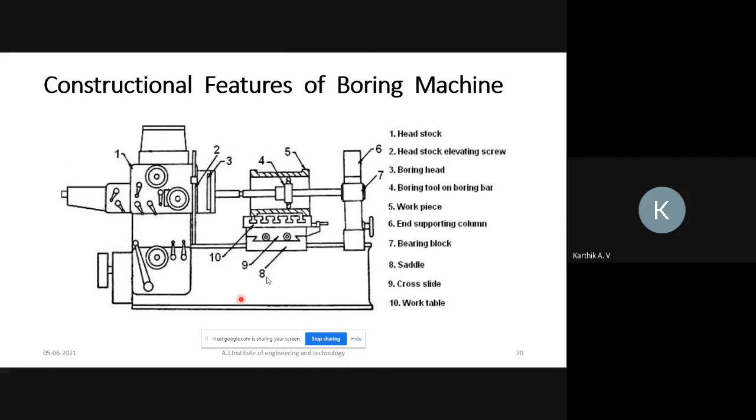Next one is the table type horizontal boring machine. Same as the previous one, this is called the table type horizontal boring machine because a table is used — the workpiece is placed above the table. All the working is the same; you should draw that sketch for this table type horizontal boring machine.

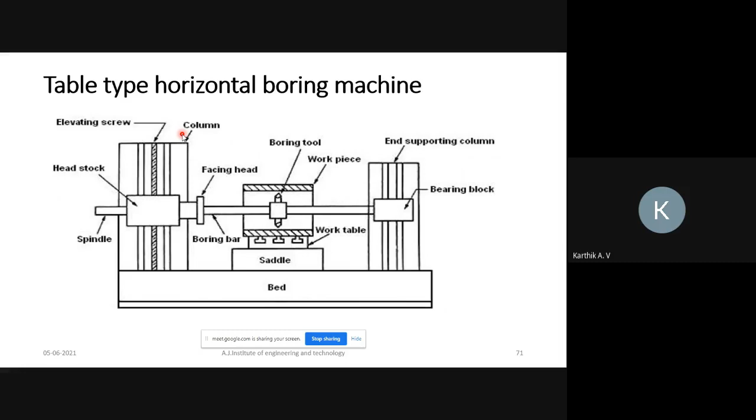Next one is the planer type horizontal boring machine. Two columns are there on either side of the workpiece. Those two columns can be adjusted, moving left side to right side. You can adjust them based on the length of the workpiece — based on the size of the workpiece, you can adjust this column.

This is the headstock, and the driving mechanism is placed inside the headstock. The workpiece is placed above this bed. So it is named the planer type horizontal boring machine. Remaining operations, everything is the same.

The other end of the work tool will be placed here. The tool is attached to the spindle, and the spindle is directly rotating with the help of a motor, and it will perform the operation. If the length of the workpiece is too long, then you can adjust this column, and the height of this headstock you can adjust in that column based on the height of the workpiece.

Why? Because this boring operation is carried out inside the workpiece, this type of arrangement is required. Here you can adjust the headstock height based on the height of the workpiece. Understood? So this is called the planer type horizontal boring machine.

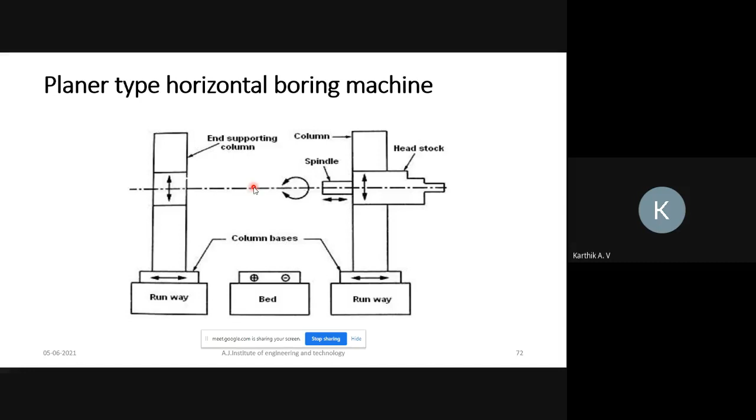Here the workpiece is directly placed on the bed. The other end of the tool will be supported with the help of an end supporting column. So the tool is supported on both ends, and as the tool rotates, it will be removing material from the workpiece — a hollow part is produced inside the workpiece. This is called the boring operation.

Next one is the floor type horizontal boring machine. All the working procedure is the same — so what is the difference here? In the floor type, the workpiece is placed directly on the floor, so large weighted workpieces can be handled in a floor type horizontal boring machine. Very simple — the workpiece is directly mounted on the floor, and all the remaining operations are the same. Any doubt?

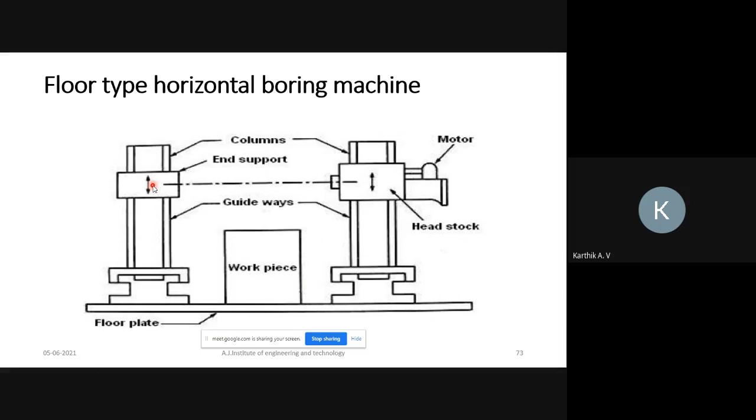Next one is multi-head type horizontal boring machine. The operation is same as before, but the difference is that 2 to 3 headstocks are used here, and cross rails are there so some of the tools are placed on the cross rail to perform the operation. Simultaneously you can perform a number of operations on a single workpiece. That is called multi-head type horizontal boring machine.

Here you can observe the multi-head headstock, 2 to 3 headstocks are there, and each one has a separate motor to run the spindle and the tool. The cross rail moves in the column upward as well as downward to perform vertical operation, while the remaining two headstocks perform operations on either side of the workpiece. Simultaneously it performs operations, and it is mainly used for mass production system. So it is named multiple head type horizontal boring machine.

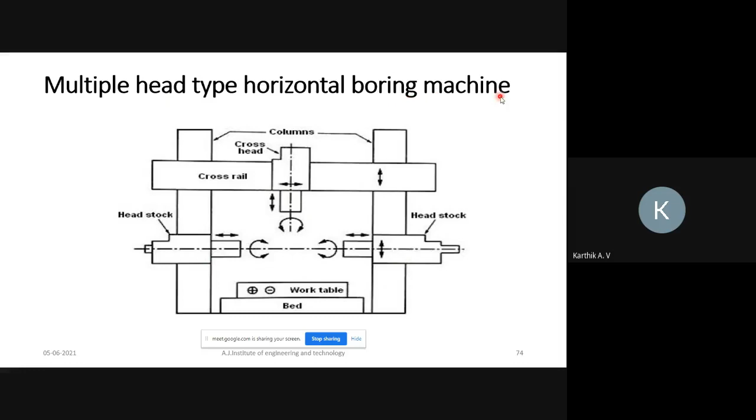Next, vertical boring machine. So far we have seen the horizontal boring machine, now we'll see the vertical boring machine. This is also called turret boring machine, or double column vertical boring machine. How many columns are there? One column, two columns - so it is named double column vertical boring machine.

This is called the cross rail. The cross rail can be moved upward as well as downward direction in the column with the help of this elevating screw. And this is the tool - it will be rotated with the help of a motor, rotating in vertical direction to perform the boring operation.

You can move this cross rail upward as well as downward based on the height of the workpiece. A small height workpiece can be handled by lowering this cross rail to perform the operation. If the height of the workpiece is too long, you can adjust this cross rail upward direction and perform the operation similarly. This is called double column vertical boring machine.

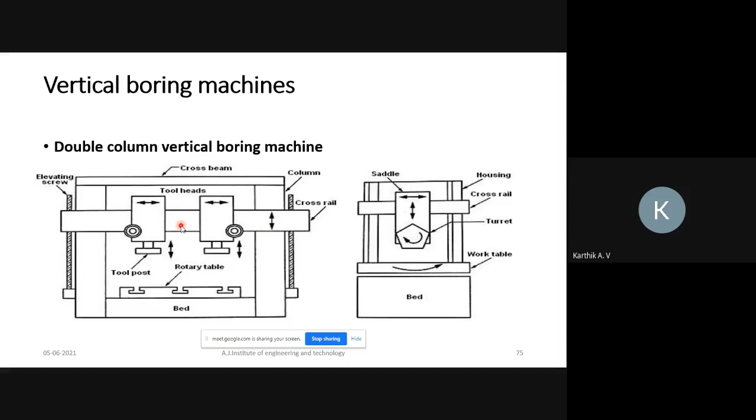Boring is nothing but enlarging the previously drilled hole. This tool can be moved left side to right side and right side to left side based on the requirement. This is a manual method to move this tool from one location to another location. This is the working principle of double column vertical boring machine.

Next one is jig borer. I hope all of you know about jigs and fixtures. Fixture is mainly used for holding purpose - it is mainly used to hold the workpiece properly, that is called fixture. And jig is nothing but to set the position properly. This jig is mainly used to improve the accuracy of a drilling machine - that is one of the tools.

That tool can be produced with the help of this machine, which is called jig boring machine. Jig is one of the tools used to improve the accuracy of the drilling machine, and that tool can be produced using the boring operation in this machine. With the help of boring operation, you can produce that jig equipment. So that machine is called jig boring machine.

Here is the spindle head - the motor is placed inside the spindle head, then the column, and spindle housing. The spindle will be continuously rotated with the help of the motor. You can move this column upward as well as downward based on the height of the workpiece. The workpiece is placed above the work table, and this saddle can be moved left side to right side and right side to left side, having sufficient groove inside the saddle.

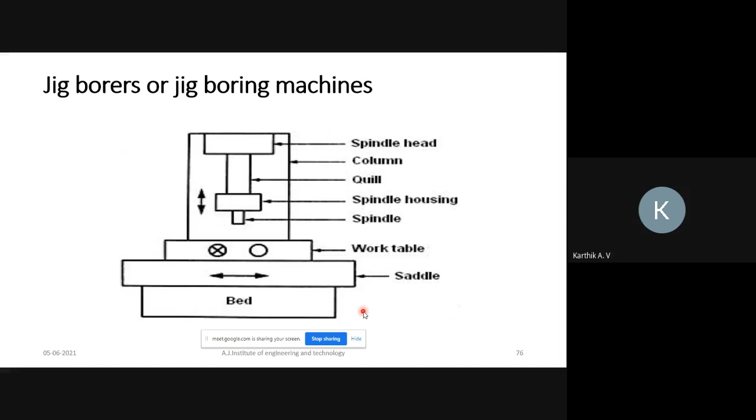So drilling can be done with a jig machine. This is actually a jig machine. This equipment will be produced here.

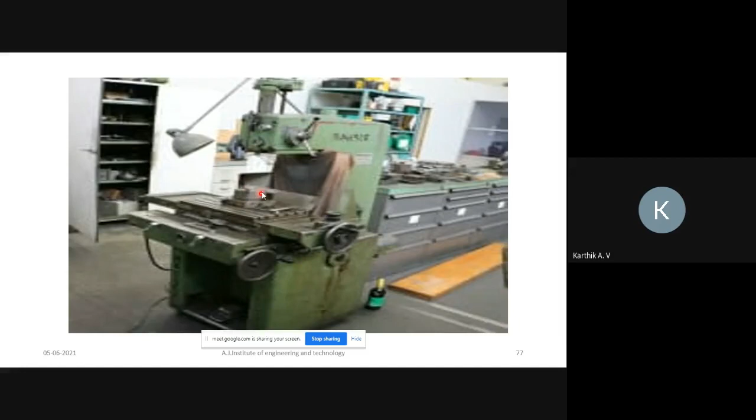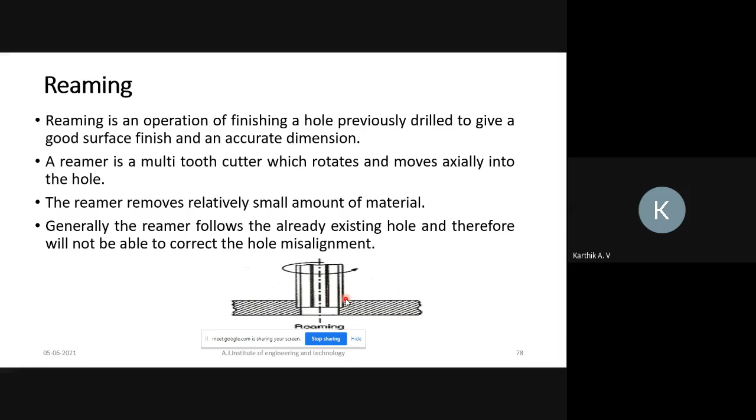Next is the reaming operation. As I already explained, reaming is mainly used for fine finishing after a drilling operation, using a reamer tool. The reamer tool removes fine particles in the previously drilled hole and produces smooth finishing in the workpiece. That is called the reaming operation. Mainly, reaming operation is used to improve the accuracy of the previously drilled hole with the help of this reaming tool. Understood? Any doubt?

No sir. Okay, so the next topic is shaper, the last topic in this module. Last topics are shaper machine, planing machine, and slotting machine. All three machines have the same mechanism, but the operation method is different. You will see one by one.

So what is a shaper? As the name itself suggests, a shaper is a reciprocating type of machine tool. This is the ram, which will reciprocate. The tool is fixed to the tool post, and the tool post is placed in the ram.

The ram moves in the forward direction as well as the backward direction in the shaping machine, producing different types of grooves or flatness in the workpiece. It is just giving shape to the workpiece - V shape, U shape, different types of shapes can be produced with this machine. So it is named the shaper machine. A shaper is a reciprocating type of machine tool in which the ram moves the cutting tool backwards and forward in a straight line.

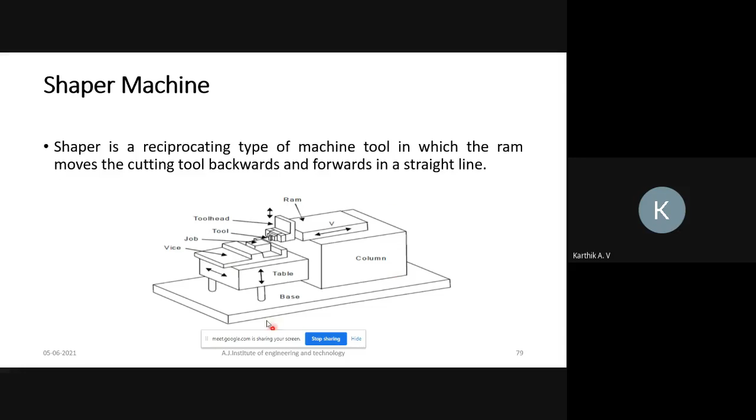Understood? So which mechanism is using here? Whitworth quick return mechanism. I think you already studied this in KOM, right? That mechanism is in the first chapter itself, right? Yes or no? Just tell me. No? Okay sir.

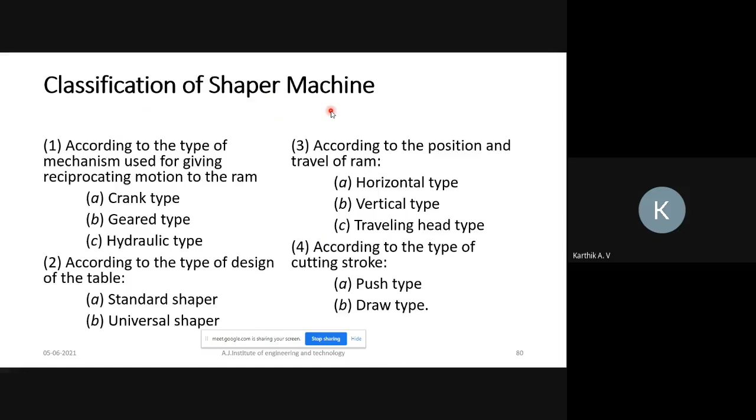Now we'll see the basic parts of horizontal shaper. Just to see the parts of this shaper machine, I'll give you one minute of time.

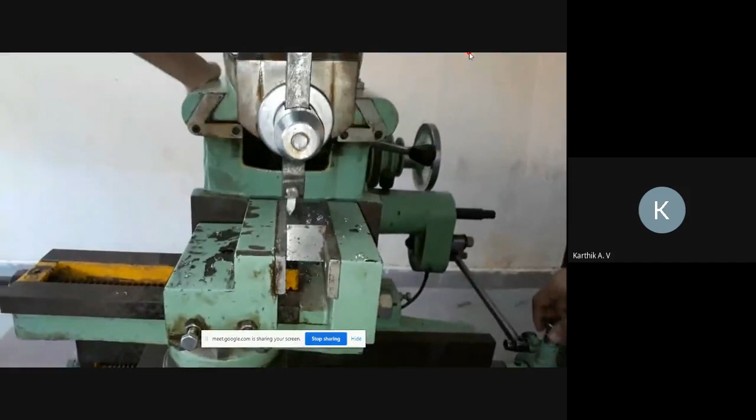This is the working principle of the shaping machine. Now we'll discuss the machining operations of the shaper, starting with machining a horizontal surface.

The tool is fixed to the tool post and moves forward and backward. During that time it removes material, producing flat horizontal surfaces. This is how the horizontal surface is produced.

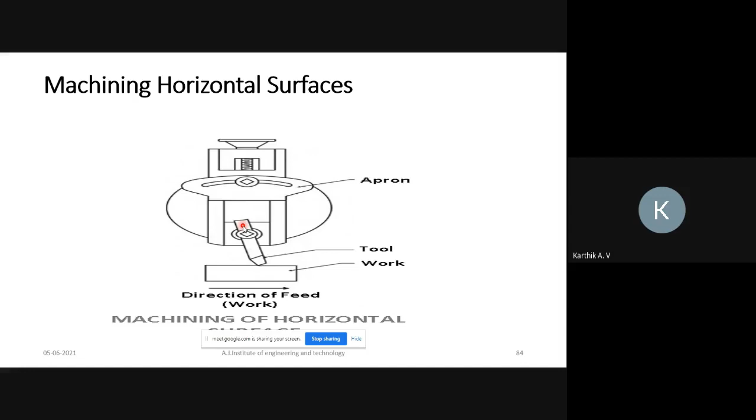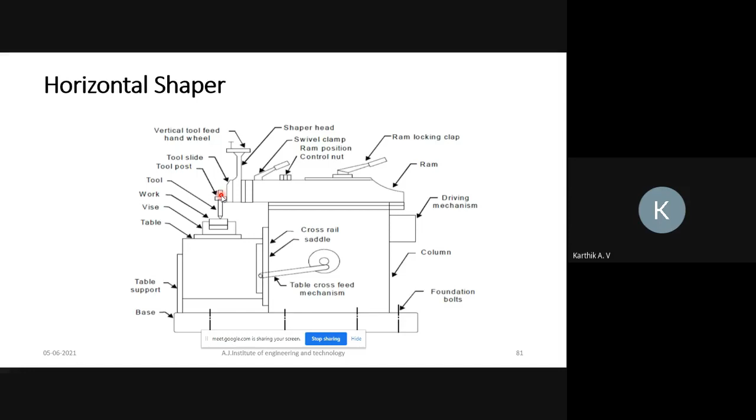Suppose you want to produce flatness on a vertical surface. You should rotate the apron, which is the tool, to a certain angle, not the tool post itself. Using the tool slide, you rotate the tool post to a certain angle, and this is used for vertical movement. So the apron can be rotated to a certain angle, not the tool post.

After rotating the apron, you give downward feed with the help of this mechanism, rotating the tool post so it moves in a downward feed. This is called the tool feed mechanism. We should not rotate this tool feed mechanism itself.

Instead, just rotate this apron to a certain angle, then give feed with the help of the tool feed mechanism, so the tool moves downward and produces vertical flatness in the workpiece. This is called machining a vertical surface.

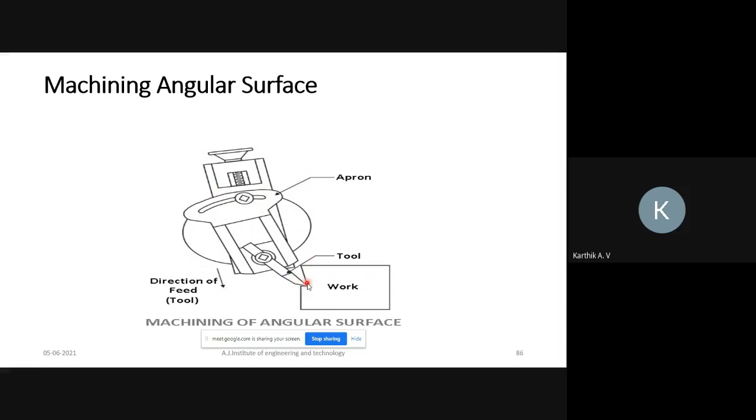Next, how to produce a machining angular surface? Rotate the apron along with the tool feed mechanism to get a certain angle in the workpiece. Suppose you want to produce a 30-degree or 45-degree angle, the same degree marked on the tool feed mechanism should be rotated, then you perform the operation. That is called machining angular surface.

Next, irregular shape. Suppose the surface is irregular in shape, then a fine finisher tool is used, fixed to the tool post, and it performs the operation to get fine finished surfaces. For that purpose, a fine finish tool is required.

One thing to remember: the tool strength should be higher than the workpiece strength.

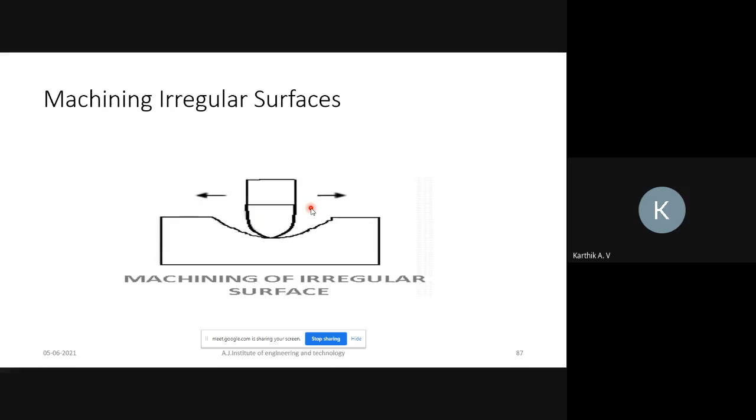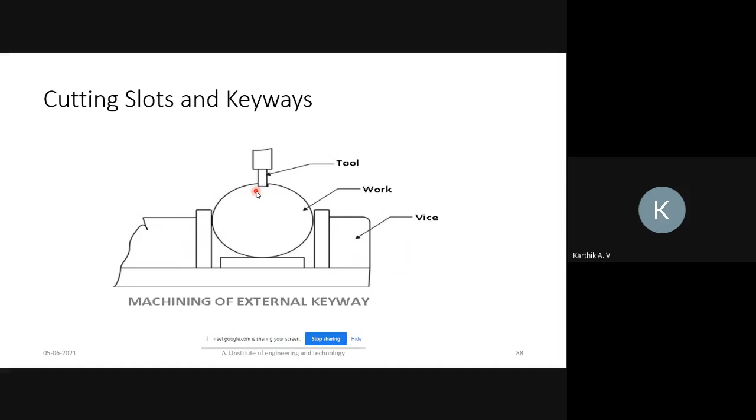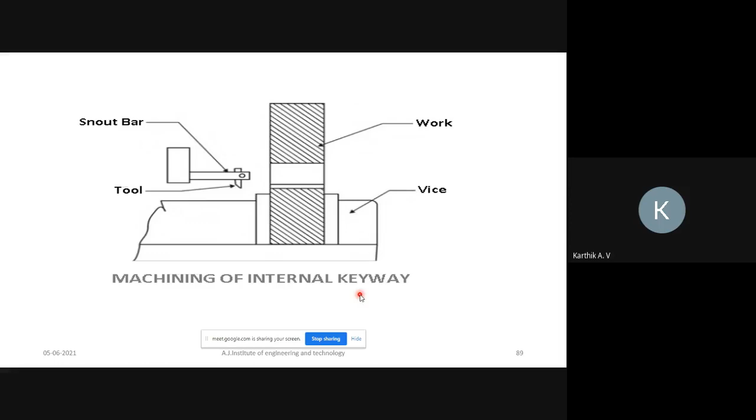Next, internal slots and internal keyways can also be produced. This is the tool here, a horizontal tool is used along with small types of tools. You can move this forward and backward, same as previous, the ram moves forward and backward, and the inside material gets removed, giving you internal keyway slots.

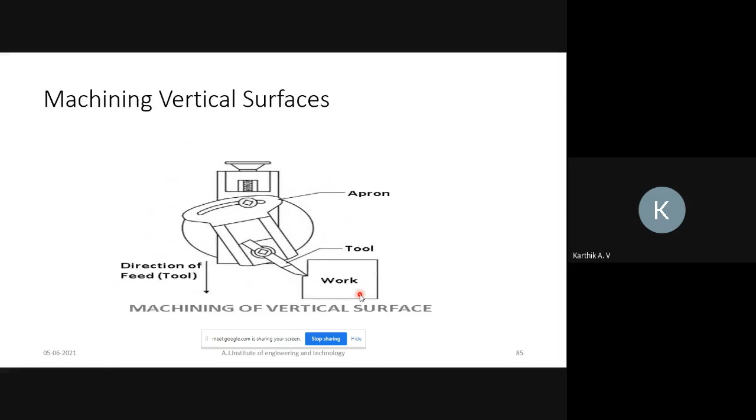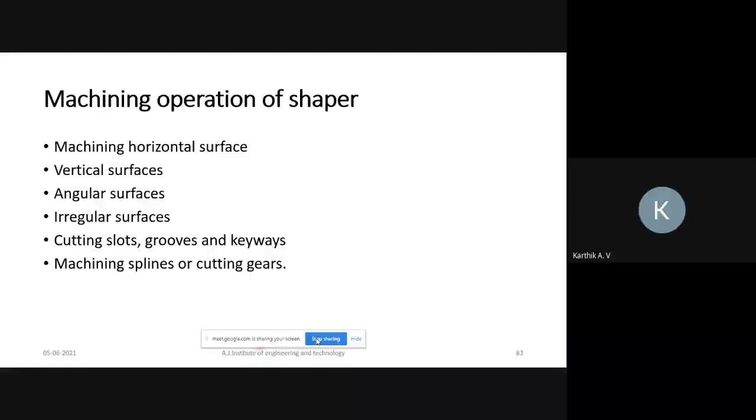I hope all of you understood the concept. Understood, right? Any doubt in the concept? No, sir. Okay.

So what are the topics we discussed till now? Boring machine that we have studied - single column type, double column vertical boring machine, jig boring machine. Then we studied reaming operation. Then shaper machines, out of which horizontal shaper we studied. Then operations carried by shaper machine: machining of horizontal surface, machining of vertical surface, machining of angular surfaces, machining of irregular surfaces, machining of external keyways and internal keyways, and the last one is gear cutting.